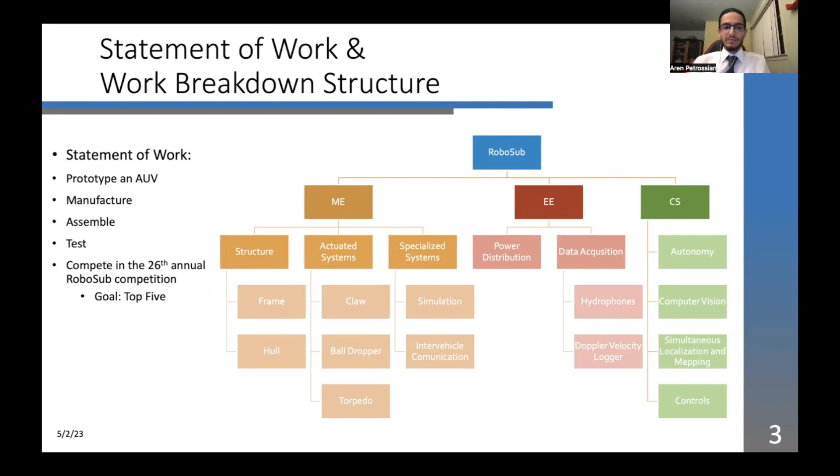For the 26th annual competition that we'll be participating in, it's going to be happening in the TRANSDEC in San Diego, which is a Navy testing facility shown on the right. And on the left, you can see a top view of this TRANSDEC where they broke down where they'll be placing certain tasks, and they put icons for what those tasks would be, like the gate, the buoy, the dropper, all of those different tasks.

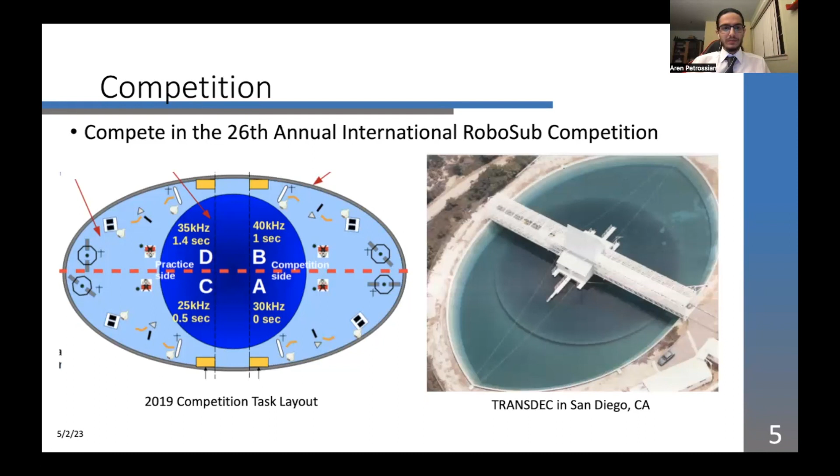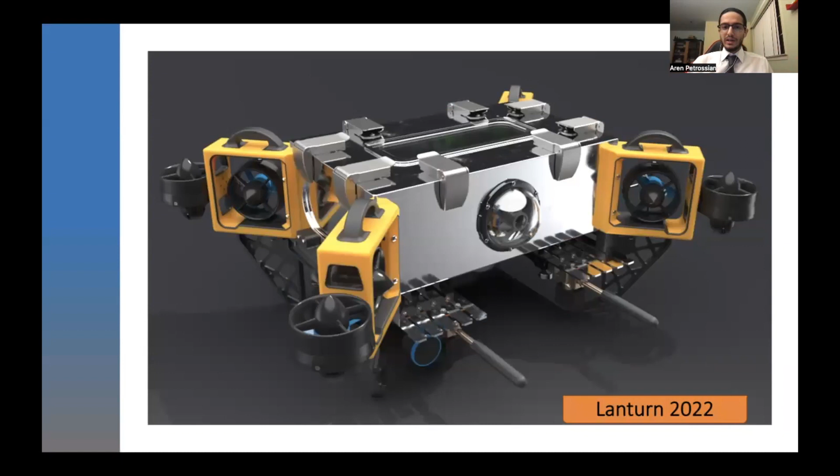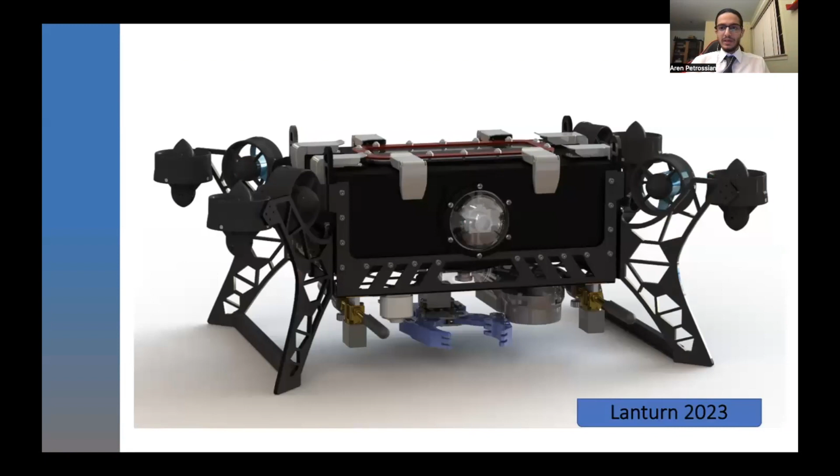Here we can see a photo of Lanturn, our robot. This was what the 2022 last year's senior design team had left off on. And on the next slide, we show our 2023 robot with all of the changes we've made, and we'll talk in this presentation about what those changes were and why we made them. But I'll continue by passing it on to Tianyu to talk about the frame.

Thank you, Aren. Hello, my name is Tianyu Ma. So I will talk about the frame part. For the frame, in the competition, the frame will provide adequate support for the critical components and be optimized to avoid stress concentration to withstand load without any deformation or failure, and also to be physically stable when we put the vehicle in the water.

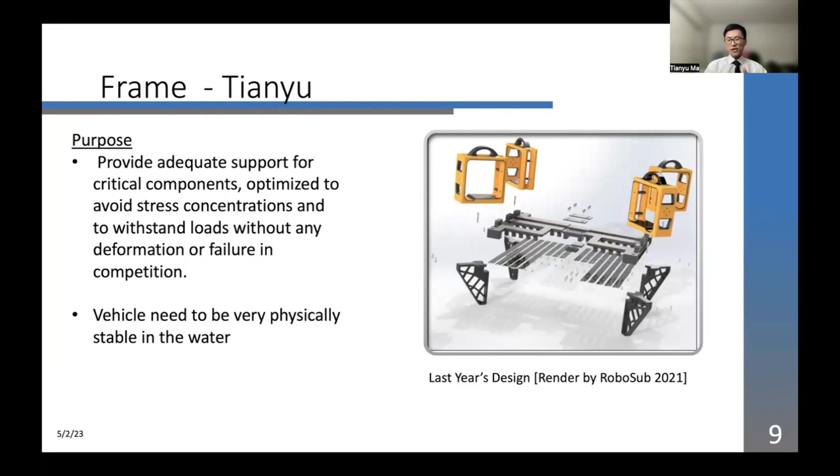So for the right picture, it shows last year's senior design team's design. We can see they used a lot of 3D printed parts, but this is not a very good design. So next slide, please.

So this year we just overruled last year's design because at the beginning, our advisor told us to avoid unnecessary intricate geometry and higher risk points of failure. So do not use 3D printing. And also, because the frame will mount 8 thrusters, the frame will give more strong mounting support. For this picture, it shows this year's new design. We use aluminum, cutting, bending, and welding to get this. Next slide, please.

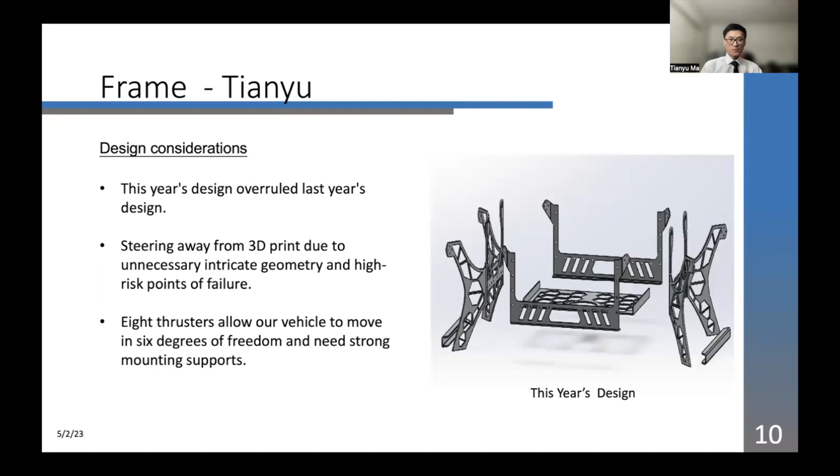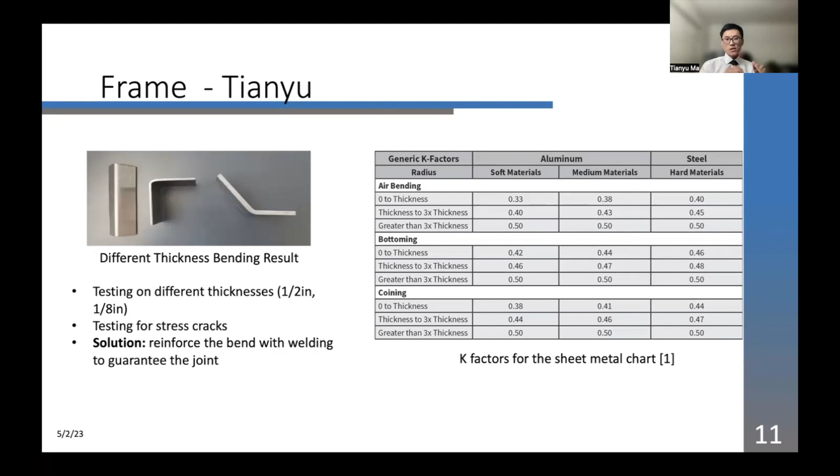When drawing from SolidWorks, we set the K factor as 0.5, but in real life it has various conditions, so we tried to bend for different thicknesses. This picture shows the result after bending. We can see it's a little bit cracked, which we don't want to appear in the competition. So we use welding to reinforce the bend and to secure the joint. Next slide, please.

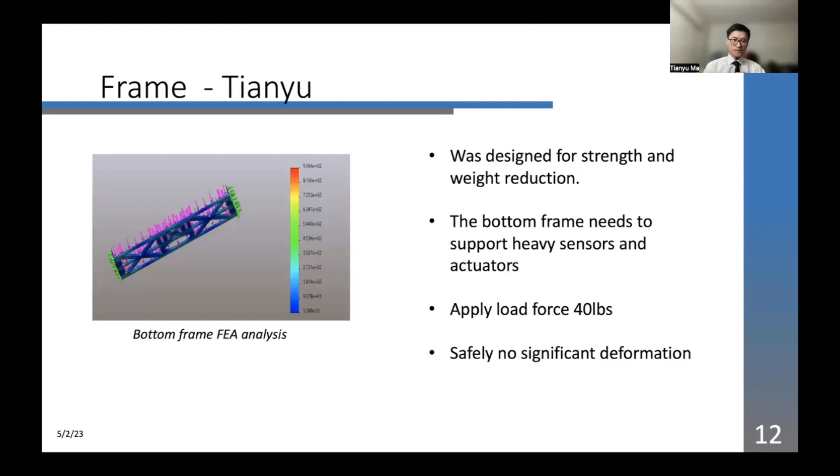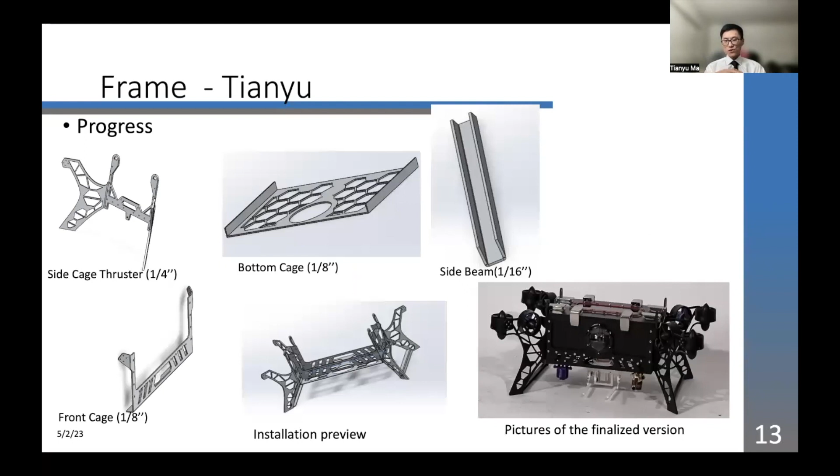We want to mount the camera to the hull, but there was no perforation, and the hull has no screw hole. Luckily, this year's camera is very small and light, only 17 grams, so it allows us to use 3D printing to make a bracket. We don't want to drill a hole because it will cause leaking, so to save time and let the CS team easily remove and reattach it, we use heavy duty Velcro rated for 10 pounds to attach the camera bracket to the hull.

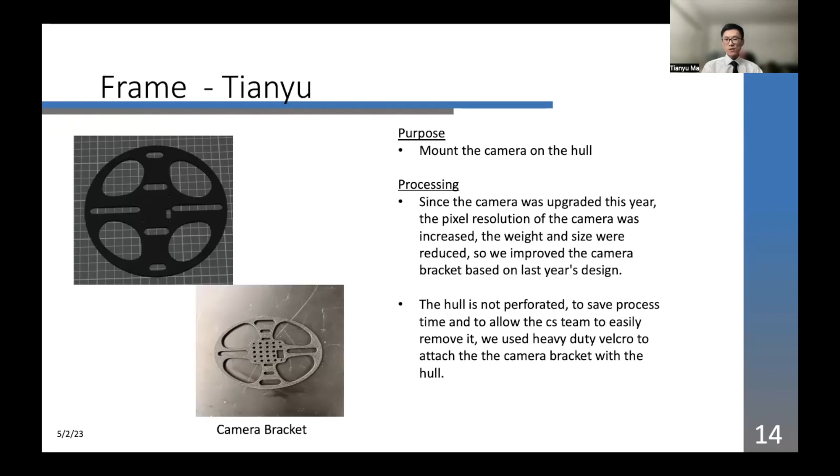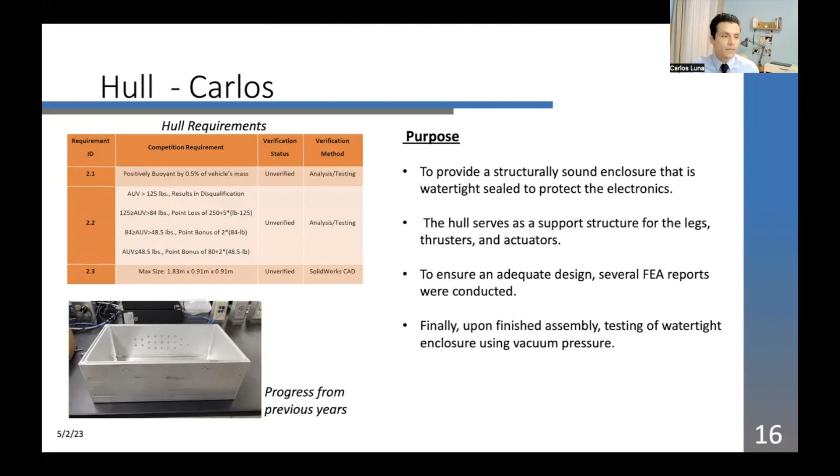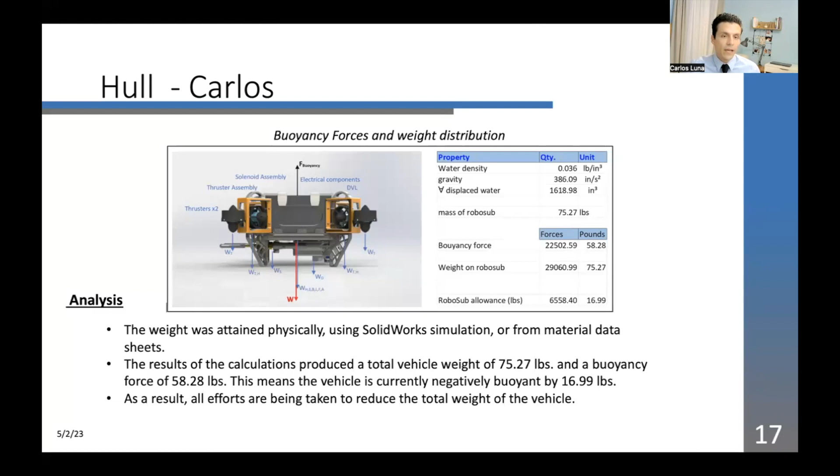The first thing I did was analyze the buoyancy forces and weight distribution. I took the weight of all the different components, and it ended up being 17 pounds of negative buoyancy, meaning we needed to reduce weight.

So the first thing I did was create some cutouts on the hull, which significantly reduced the weight. It was approximately half an inch thick, and I reduced it to a quarter inch thick. Of course, it then needed new FEA analysis. I also changed the design of the lid to reduce its weight as well.

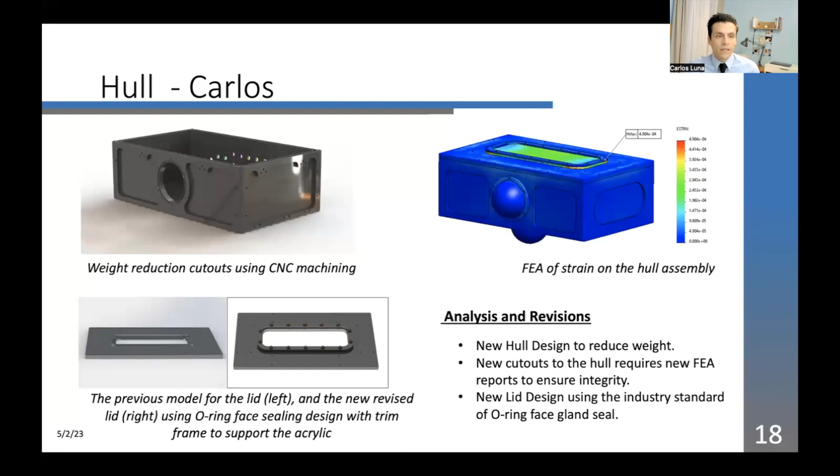The first thing I did was try transitioning to making the parts out of aluminum, machined on the CNC or mill, but weight became a factor, and the contour shapes were too complicated. So I decided to propose a new design, and after meticulous review meetings, the team finally approved it.

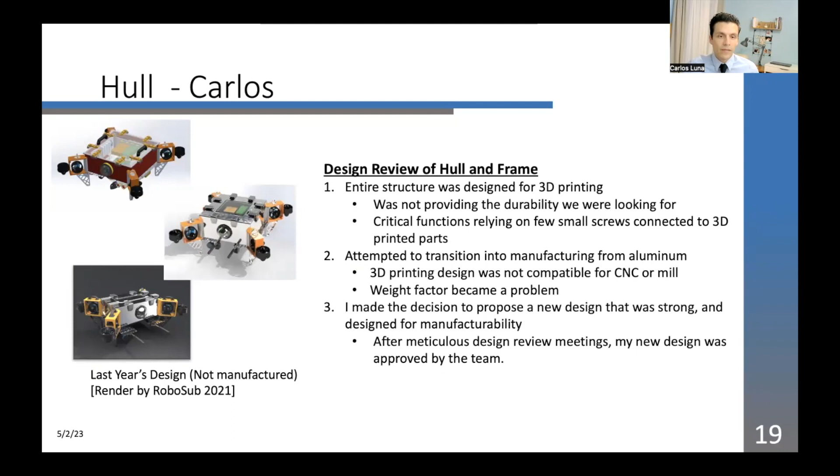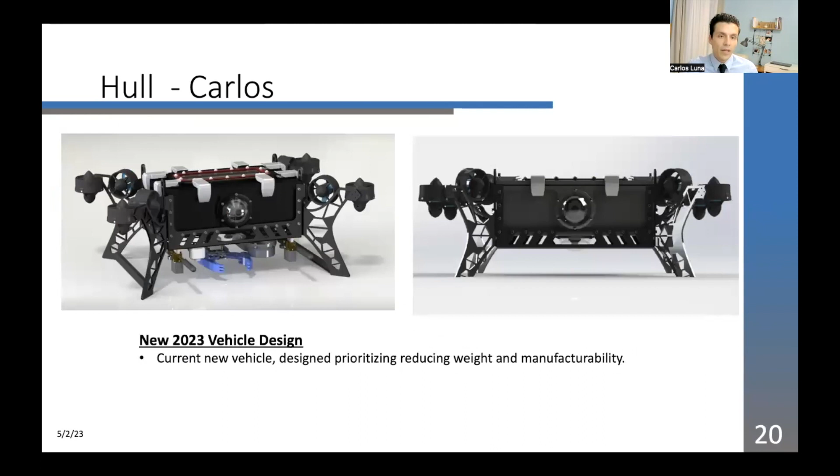This is the new design, prioritizing reduction of weight and manufacturability. It's made out of aluminum sheet with several cutouts to keep weight to a minimum. It also features a universal mounting system where you can mount sensors and actuators anywhere on the cage, with no need to drill additional holes into the hull. There are several rigging points, and the legs are really strong. So it was looking good.

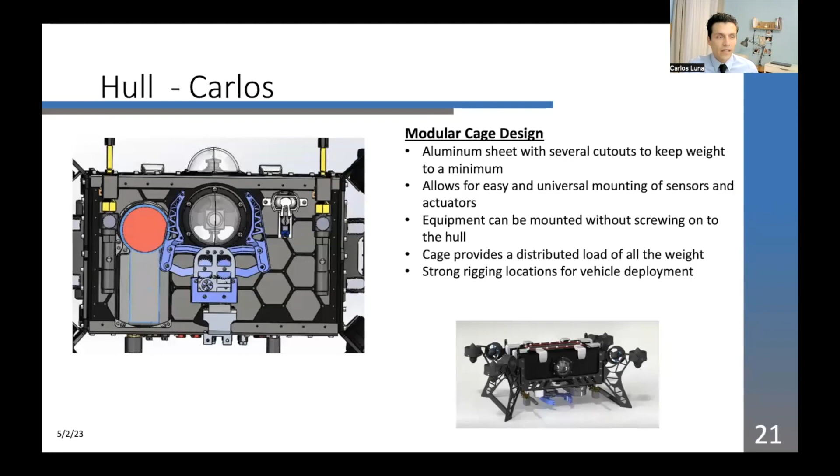Here we needed some new FEA analysis, with a factor of safety of 5, and it passed with no yielding. During modeling, I used sheet metal modeling that allowed me to easily flatten the sheet and produce the G-code needed for water jetting.

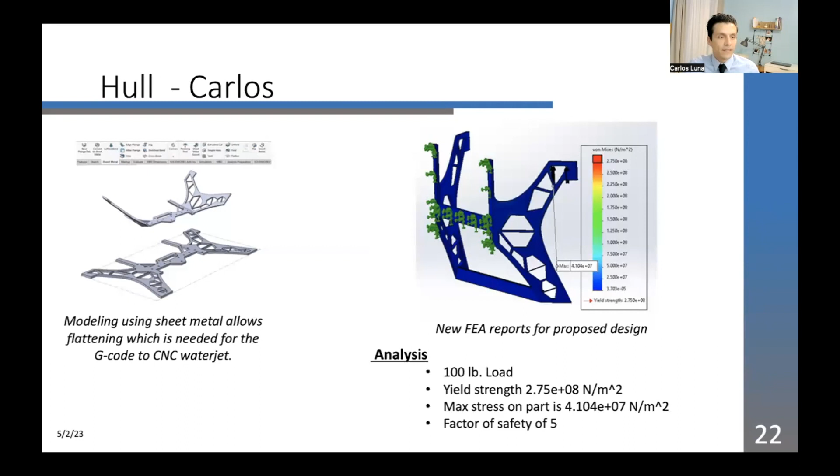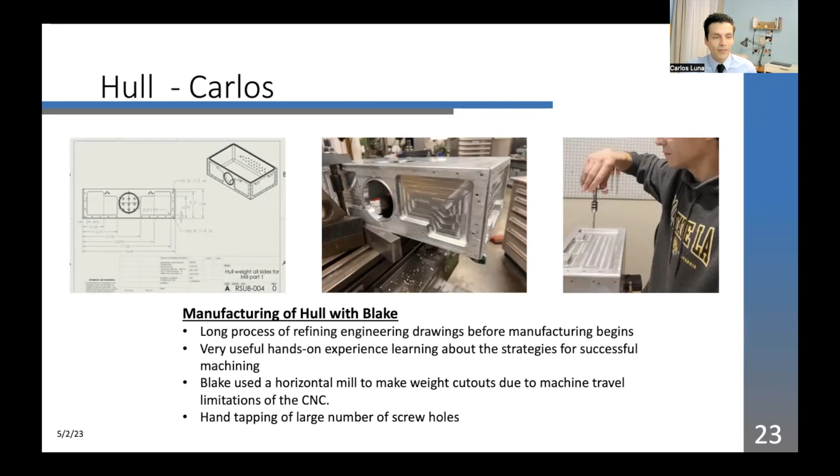Next was manufacturing, working with Blake. Initially there was a lot of back and forth, refining the engineering drawings. It was useful firsthand experience learning about tool passes and the limitations of the machines. Here you can see Blake's setup for a horizontal mill because the part was too big for our CNC, and on the right, you can see me hand tapping—there were a lot of screw holes to hand tap.

So I was under a lot of pressure to have this completed for the CS team to have a bot to work with, and also my own team to have a bot to work with. During spring break, I finished up the water jetting and cleaned up the parts after, though it still needed a little bit of fixing. I always did a fit check to make sure the parts were still fitting correctly after every single step. I completed the welding, the bending, the welding, and the anodizing.

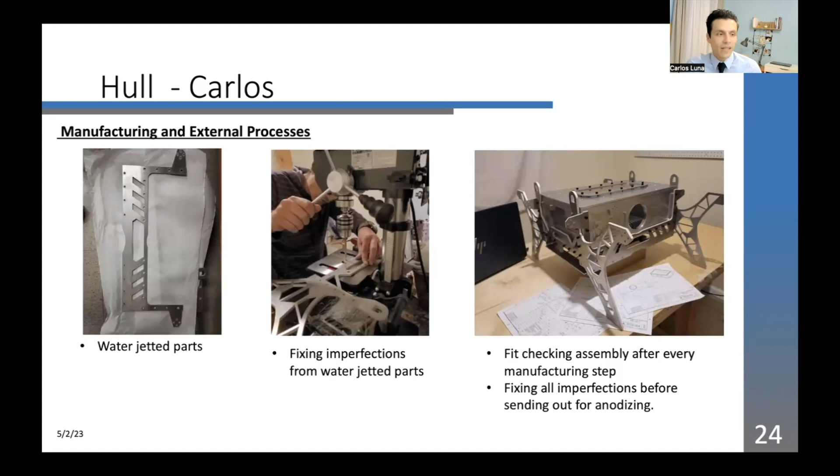Part of my tasks were to design a carriage for the inside of the hull to mount all the electronics. It features 3 different modes. The first mode is to be structurally sound for all the electronics. Mode 2 is for when you're installing or troubleshooting and need to look at all the electronics. Mode 3 is for competition, where you can easily swing open the motherboard to access the battery and quickly swap it out.

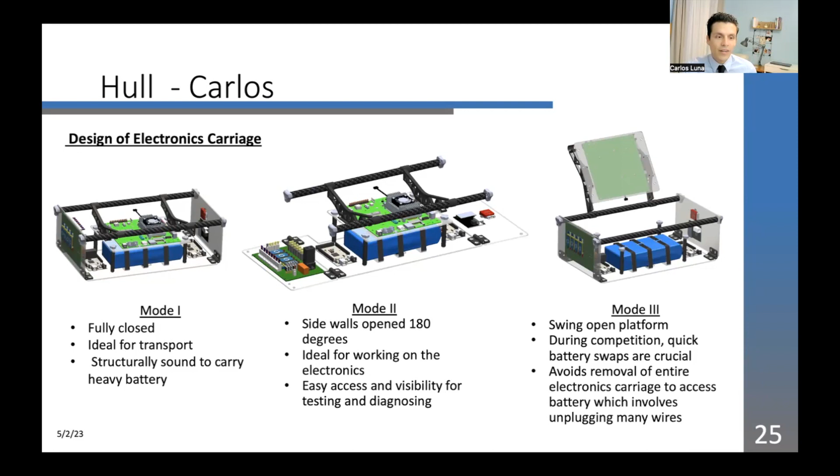Finally, we assembled the sub and had to do a vacuum test. It was very stressful because it was a year-long process of designing, and we had to make sure it didn't leak into the electronics. There were several points where it could leak, including a big O-ring between the lid and the hull, which I had to use the Parker O-ring handbook to make sure the O-ring was the correct size. I also had to calibrate the latches to make sure the compression was right. Here you can see the vacuum pump in action.

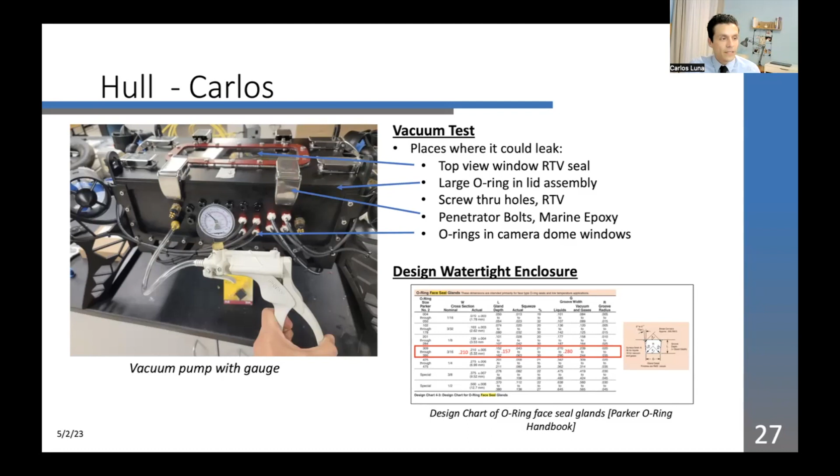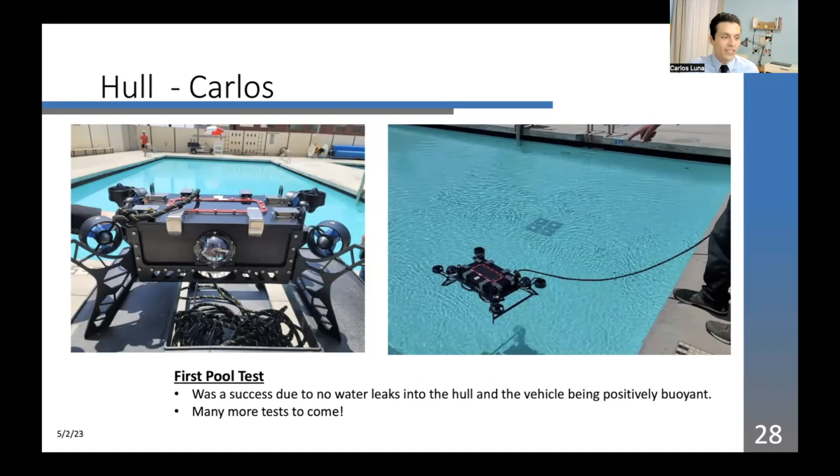This is our first pool test. We threw it in the water and it didn't leak, so we're very happy. It also was positively buoyant, so it was a huge success. However, there are many more tests to come.

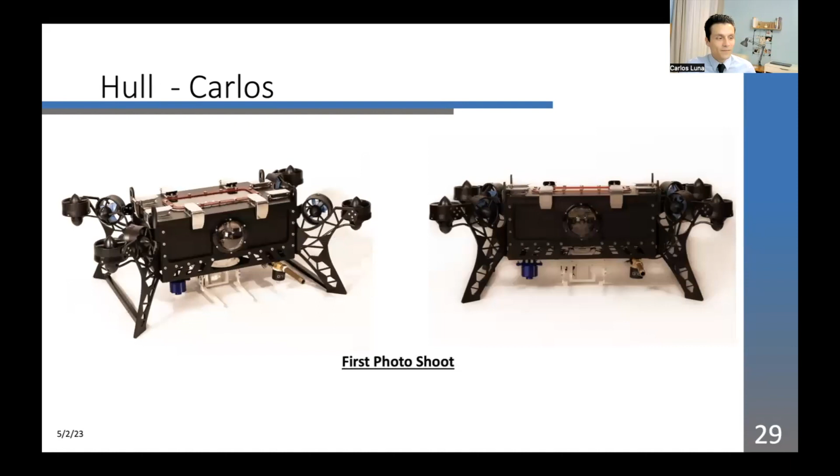This was our first photo shoot. This is our sub looking great. And with that, I'm going to pass it on to Edward Razo for the robotic claw.

I'll go down to design and functionality. The function of the claw is an actuator device that should be capable of picking up objects but also opening containers. It consists of two servos, two MG996R. The claw should be lightweight, less than 2 pounds, sturdy and waterproof. For the purpose of our claw for the competition, it should be able to pick up objects, mostly bottles, and drop it off at a set location.

Our claw should be able to open containers and move covers for us to receive full points. You can also see two designs of our claw from the spring and a picture of our final design of the claw.

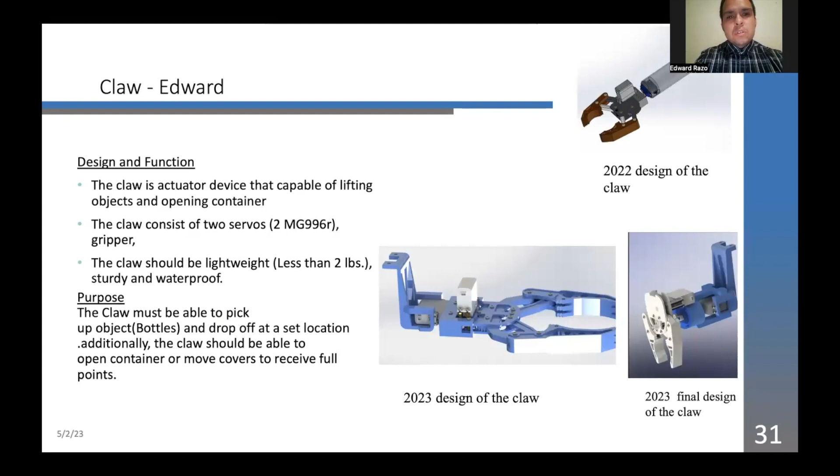At first, we initially thought it was a good idea for the claw to only have a motion of open and close. But another suggestion was to have the claw be able to rotate in case the bottle falls down or tips over when the AUV is going towards the object. Another suggestion was also to enlarge the claw's gripping ability, since we're not sure if the bottle diameter will be the same this year.

For the dimension of the claw, with the gearbox itself, it gives it 12.17 inches in length, a claw width of 3.32 inches, and it weighs 262 grams, equivalent to 0.56 pounds.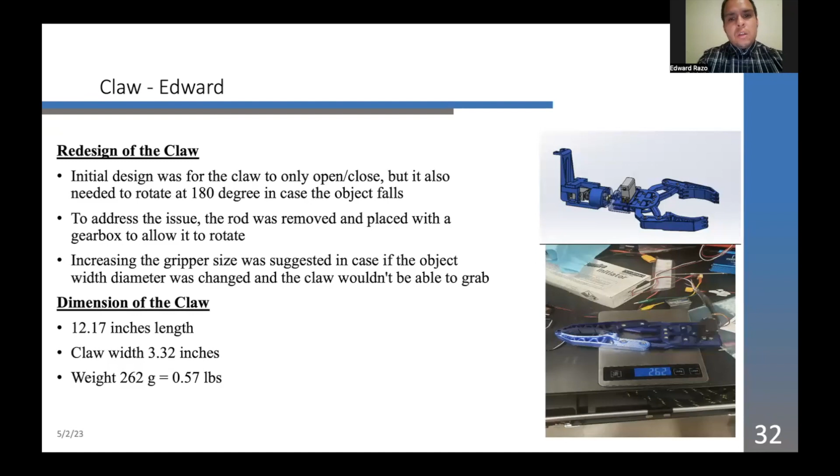Before commencing with the tests, I first put the claw in a water container just to see if it was watertight. You can see the video that it's in the pool. I'll do a repetitive motion of open and close at 4 feet. You'll see it soon in the video.

So far, it's been there for 45 minutes. There hasn't been any sign of water entering the servo, and that's a plus. It looks like the buoyancy force does not reduce the motion speed of the claw for its repetitive motion.

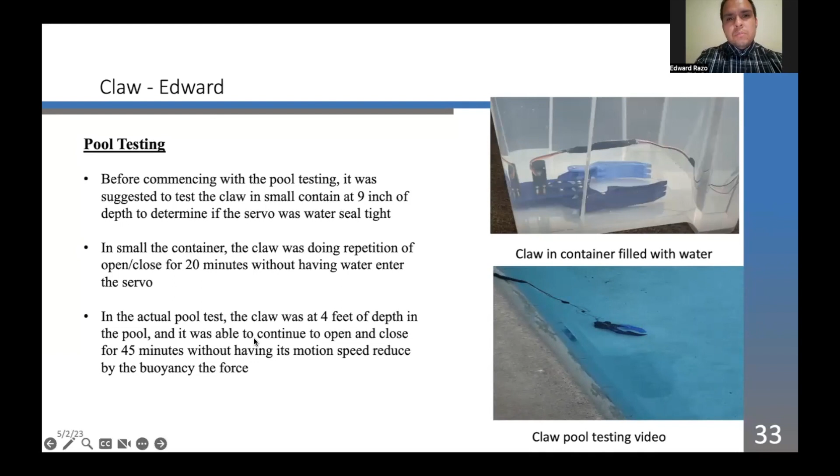Lately, in late March, we received updates to the claw rules and a new challenge as well. This was pretty much a deciding factor to change the design of the claw, both the claw and the gearbox.

The gripper itself has been shrunk. The claw width is now 1.19 inches. The length has been reduced from 12.17 inches to 2.54 inches. It's currently weighing 1.08 pounds, still less than 2 pounds. We'll continue with more testing in the near future.

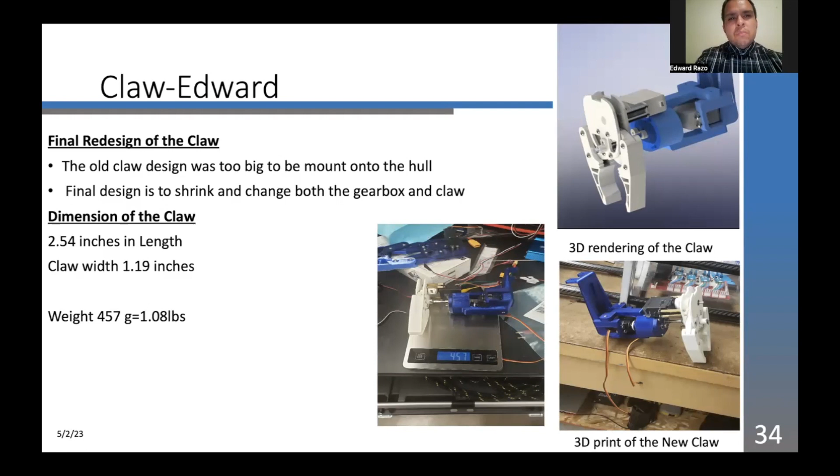Now I'll be passing the torch to the marker dropper. All right, Steven, thank you for that, Edward. My name is Steven, and I was working on the ball dropper for this school year.

The purpose of the ball dropper is to achieve one of the tasks of the competition, which is to drop two markers inside a bin, allowing us to have two markers at any given time. One of the design considerations was that we wanted it to hold two markers as compact as possible to reduce the space it occupied.

We wanted it to be easily reloadable, easily manufacturable, and at a low cost, so that if anything broke or if we had to redesign for any given reason, we could do so in a cost-effective way.

We also wanted to keep in mind that the mass and volume would not exceed what we had already designed for, which was half a pound, with the markers fitting in a space of about 2 inches squared and a height of 6 inches.

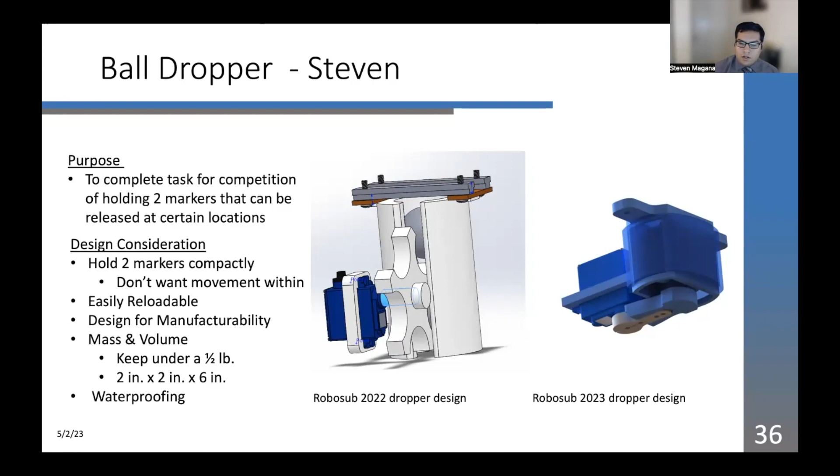Furthermore, the servo used to actuate the dropper needed to be waterproofed, and that was done using dielectric grease inside the servo so that water wouldn't penetrate inside.

Going off the previous year, we wanted to maintain as much of their design as possible to see how we could continue. Initially we decided to keep it vertical and just change the mechanism that actuated the drop. We went with a lever mechanism that released and locked the marker simultaneously.

That was done to address some of the concerns of jamming from the previous year, and also to limit the actuation angle of the servo so it wouldn't draw too much power.

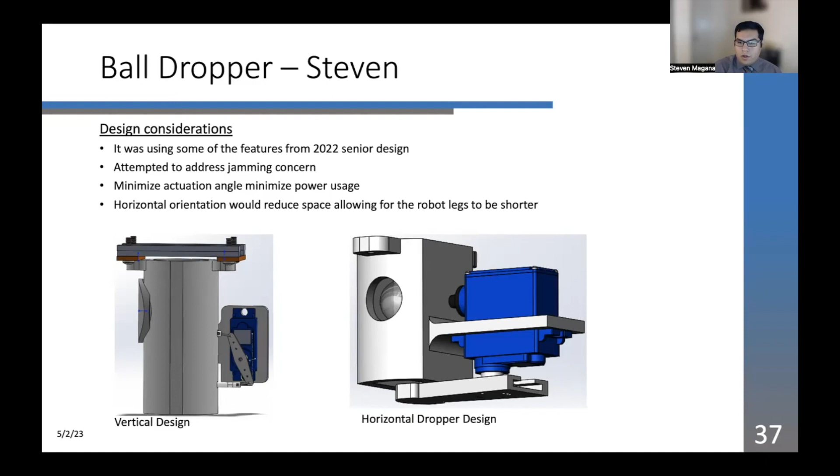After some discussion, we decided to go with horizontal markers so they would be side by side. That would reduce the overall height of the dropper and also reduce the volume by decreasing the markers themselves. At the bottom, you can see both the vertical and horizontal droppers.

The new markers were kind of looking like projectiles, like a bullet. The size was 1 centimeter squared, or rather a diameter of 1 centimeter. The buoyancy of the marker was 1.23, mainly dictated by the material, which was PETG. It was 3D printed, encasing a marble at the cone.

There was some stress analysis to make sure we wouldn't decrease the wall thickness too much, and it was well above—it didn't exceed the yield strength of the plastic.

The final design reduced the overall volume and decreased material usage, optimized using SolidWorks. We decreased the size of the marker and reduced the actuation to at least 25 degrees of rotation for each marker.

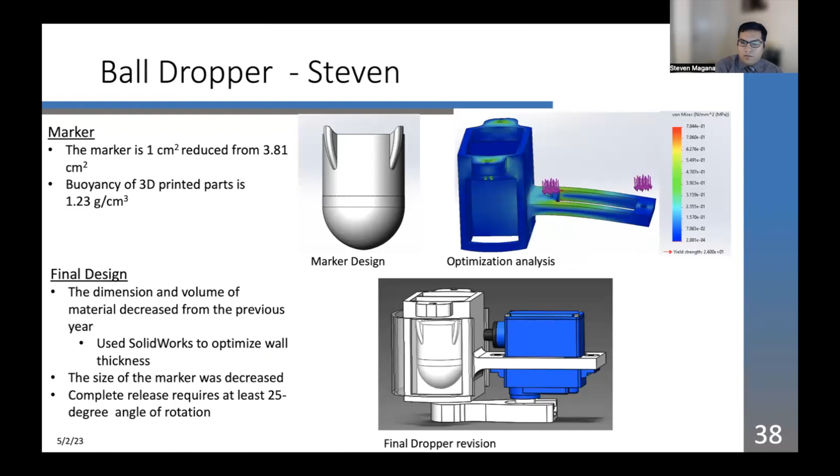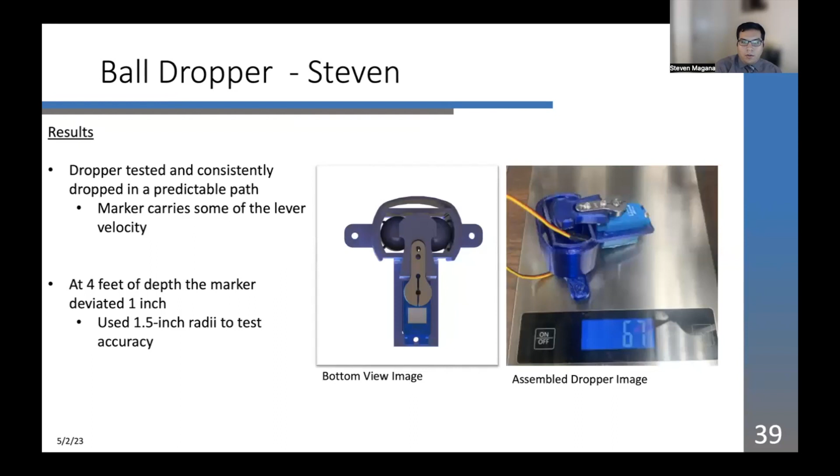The results were that the markers and droppers together weighed 67 grams. When releasing the markers at a pool depth of 4 feet, it deviated 1 inch; at a depth of 5 feet, it had 1 foot of travel. With that, I pass it on to Jose.

Thank you, Steven. My name is Jose Lares, and my task was the torpedo. For the problem definition, we're going into the RoboSub competition in San Diego for the 2023 year.

Some of the product requirements: a consideration for the competition was that it must not weigh more than 2 pounds. The torpedo must bear the name of the school and use a school logo. Also, the torpedo must not bruise a diver, and it should be designed to be safe and not harm a swimmer while the torpedo is shot. Also, the torpedo launcher system must be autonomously controlled by the robot.

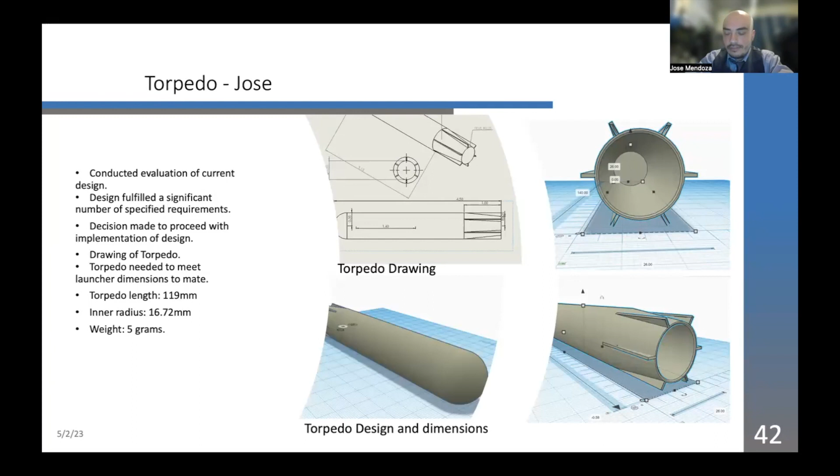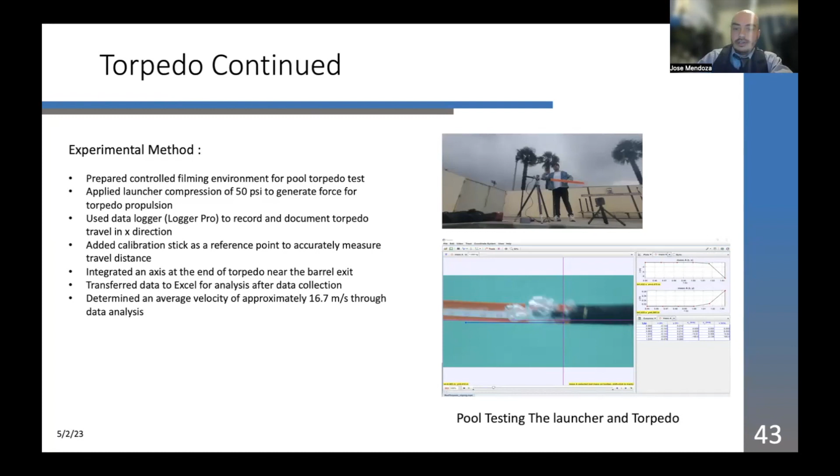To the right, you can see the equipment and setup, but that same setup would be used underwater inside the pool at a depth of about 3 feet from the ground up. To the bottom right, you see a graph from the logger software.

For this slide, I conducted research on how to build the torpedo, how to manufacture it, and what plastics to use. I found through a TA that a gyroid infill pattern provides balance between strength and weight. I used an infill of 50 to 65%, which was considered. To the right, you see an image of various torpedoes printed at different infills, and above those 3D printed torpedoes you see others with different patterns cut in half. I used multiple torpedoes to test underwater, and found that the one that was neutrally buoyant underwater was at 65% infill.

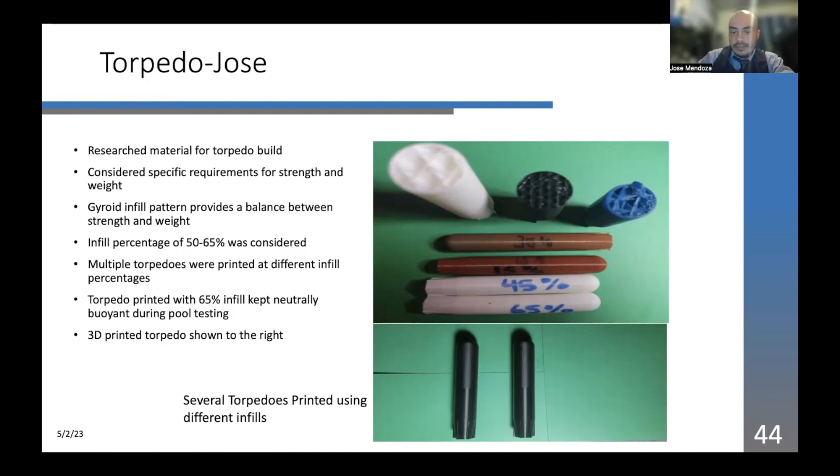On the bottom, you see the torpedoes that are going into the competition along with the AUV. And I will be handing over the camera time to my colleague Nahom, who will be delivering the simulation.

Thank you, Mr. Mendoza. So the purpose of the simulation is to develop a virtual physics-based environment to support the rapid testing and evaluation of the autonomous underwater vehicle, particularly from the software controls perspective. This is so the CS team and software development can keep moving forward while the physical robot's mechanical and electrical hardware is still being developed. On the left you see our inspiration, Project Dave, an open source project in ROS, Robot Operating System, where you have autonomous robots underwater, a demo that interacts with objects with a claw and functional thrusters. It's meant to be an iterative design process, as illustrated on the right.

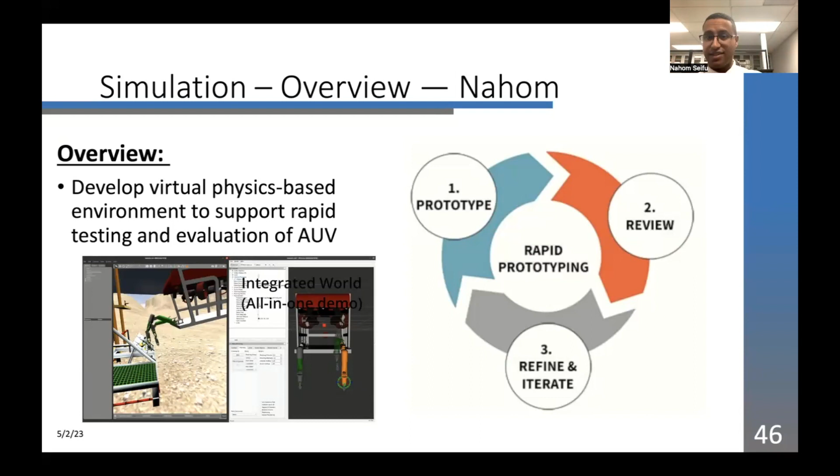So the main objective was to have, by the end of this spring, a virtual twin of the autonomous underwater vehicle to predict vehicle performance, with inputs being the software controls, and we can also look at the hydrodynamic data from there.

The deliverables were to determine the means of analyzing the model data, inserting this year's robot into ROS for evaluation, and implementing the competition obstacles and mission, as seen on the right. Part of the motivation for using ROS was that we can have a physics-based engine for implementing sensors as well, getting feedback there.

Using ROS would eliminate additional steps, since the code in ROS for the controls would have less processing to get it into the robot than if we used something like MATLAB. That was the advantage of picking Gazebo ROS, which also provided the opportunity to go into low-level C++.

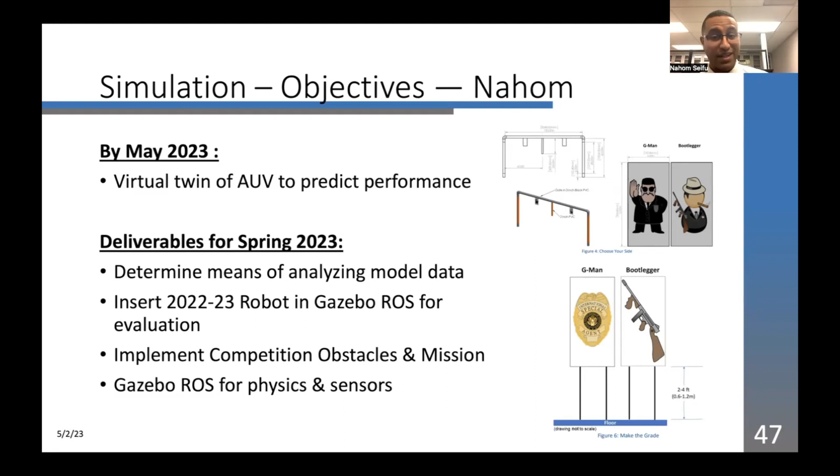So a day in the life of the workflow, to keep it high level, was a lot of working with the terminal. There was a lot of time taken installing the software and starting off with our inspiration, Project Dave, an open source project that you see on the left side of the figure.

And that's where it took a lot of inspiration to begin the project.

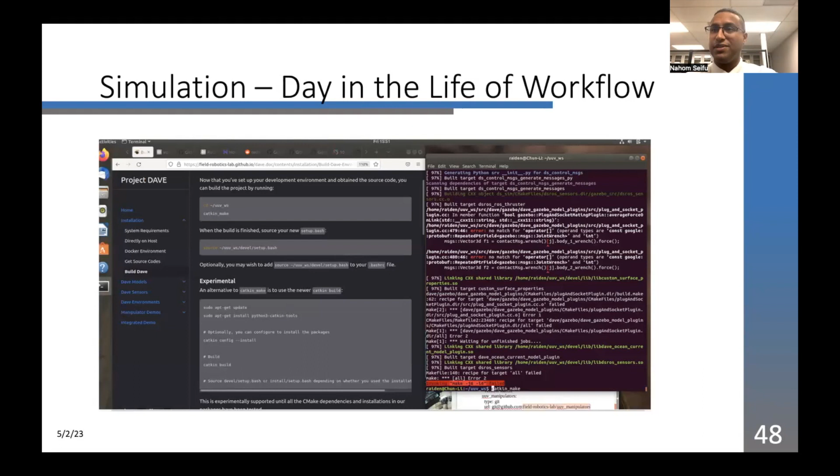The big highlight and milestone was to have a working demo of a robot from Dave that actually moves around the ocean floor with some physics based on water and the actual mechanical properties of the robot. So we set it to some fixed velocity for pitch and yaw and the thrusters, and we got it moving in a circle, which is a big achievement. This verified the proof of concept.

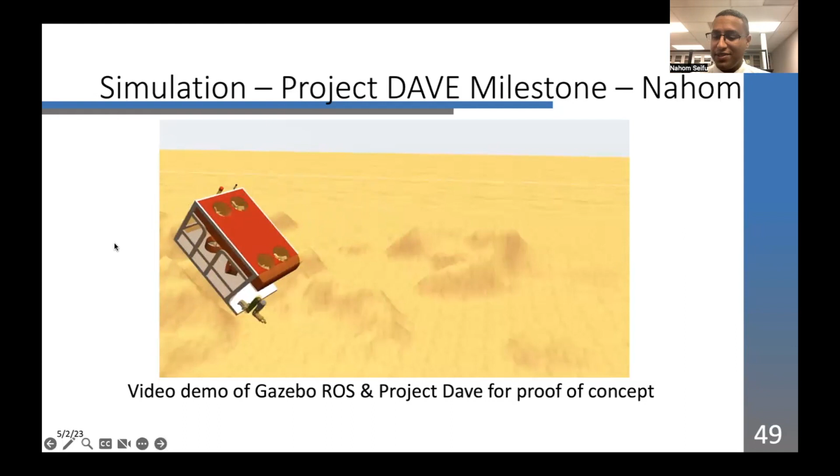The next big steps there are actually getting the robot into ROS, our robot, and having it function. That's where a lot of troubleshooting came in.

So we had to verify that the model data that we pulled from SolidWorks, along with basic hand calcs, actually made sense. From there, we got thruster positions that were rectified and a robot that better behaved, that better followed the laws of physics.

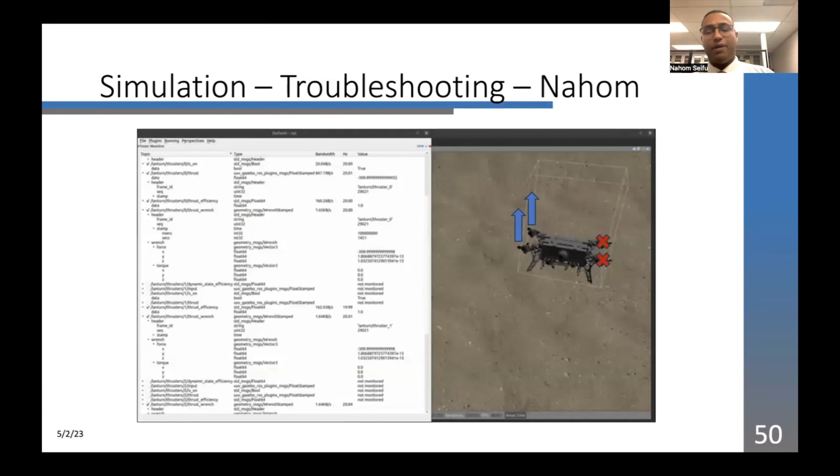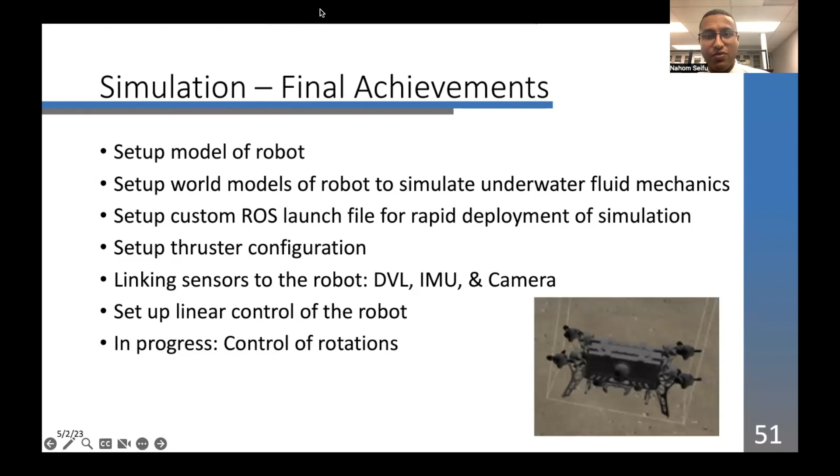The best part about this platform is that it exists. It'll exist for future RoboSub team, senior design, and club to develop their control software while mechanical hardware is being developed in parallel. Thank you very much, and I pass it on to Aren Petrossian.

Yeah, okay, thank you, Nahom.

So for the intervehicle communication task, 1,000 points are given in the competition for teams whose two AUVs are able to communicate with each other. The communicated data could be anything from a simple Boolean to floats of XYZ or yaw, pitch, roll orientation values. Previous years from Cal State LA haven't attempted this task, but the two most common ways to do this are with blinking LEDs and with sound waves, or acoustic waves.

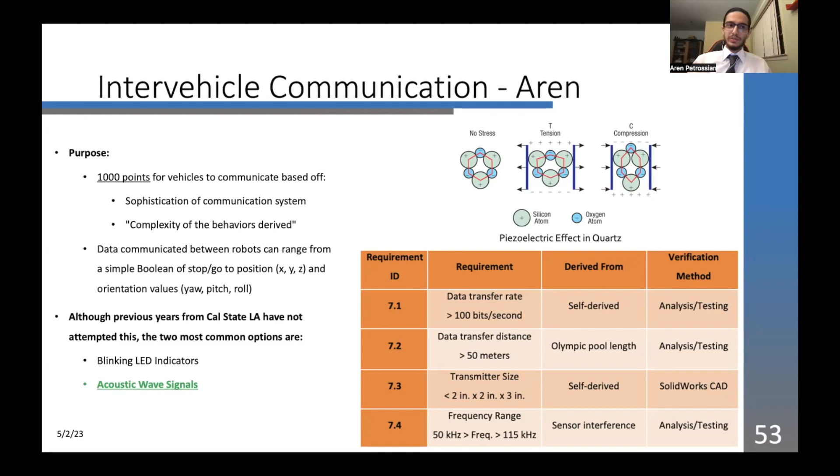Because the points are based off the sophistication of the communication system, we decided to go with acoustic waves. The main effect used is the piezoelectric effect, shown in the top right. For the system I'm making, my requirements were to have a data transfer rate of more than 100 bits per second, to be able to communicate from more than 50 meters apart, to have a small transmitter size, and to have a frequency range somewhere between 50 to 115 kilohertz, which came from competition rules and other sensors interfering.

On the far right here, you can see a PZT cylinder, which is the core of the device I made. This cylinder takes a voltage wave and gives out a sound wave at the same frequency as the voltage wave. I looked at various different PZT options and decided to go with the Steminc 65 kilohertz PZT.

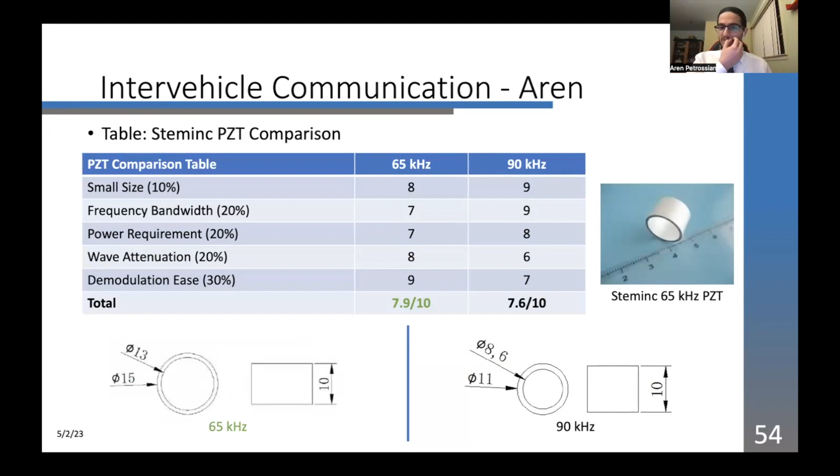For this PZT to work, I had to encase it in epoxy. But to do this, I needed to make sure the PZT would be centered inside the epoxy. So I decided to make this mold along with two spacers out of PTFE, which I machined using a lathe and a mill.

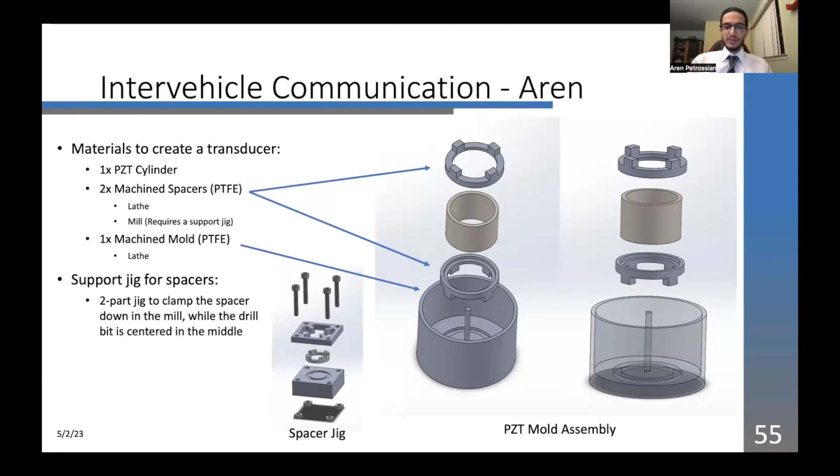Machining the spacers on a mill requires a support jig, shown in the bottom left. This was a two-part jig where I just screw the lid on and hold it in place while the mill runs.

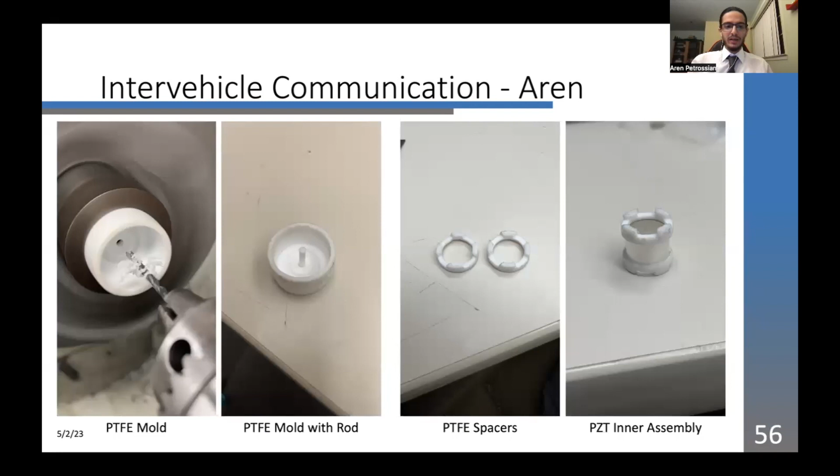This is a photo of just the machining process, making the parts and putting everything together. If I skip to the next slide, I can show on the bottom left, this was the completed mold assembled and put together. You can see the mold on the outside and the PZT sitting between the two spacers.

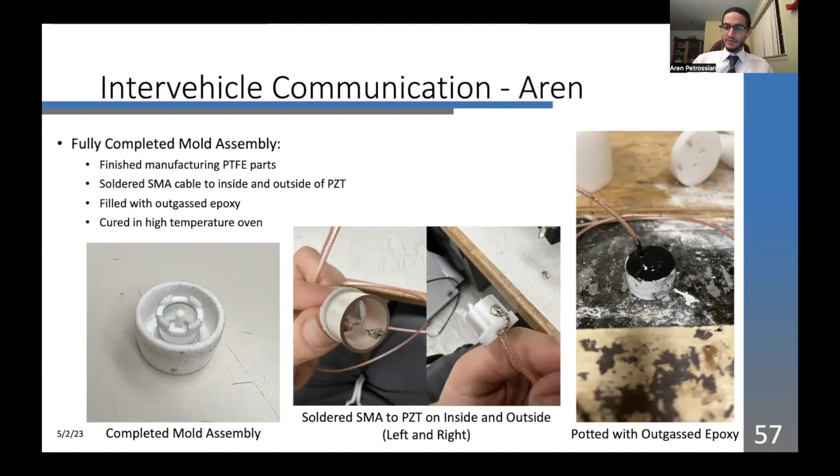In the middle, you can see one wire that's soldered to the inside of the cylinder and one wire that's soldered to the outside. This allows me to apply a voltage to the material. On the far right, you can see the mold that I took with the PZT inside filled with outgassed epoxy.

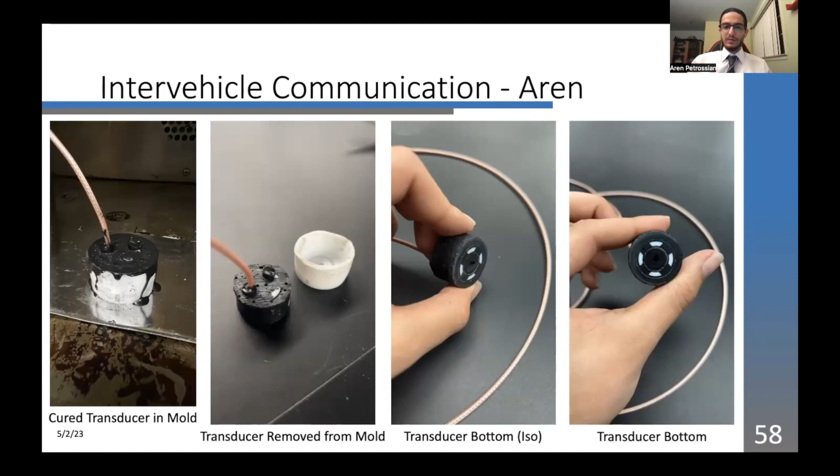To actually power this transducer, I had to come up with a power circuit option that would let me give it a high voltage sine wave. So I looked at various circuits shown in the top left and found the R15-100B boost converter on the bottom, which takes our battery voltage and outputs up to 130 volts.

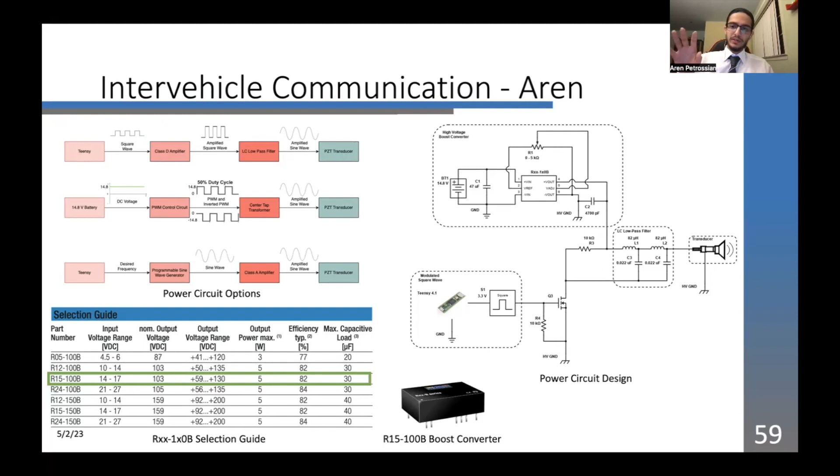So I took this circuit, since I knew that it worked, and put it into KiCad and designed a PCB around it, and there's a render of that on the left.

Then I took my transducer with off-the-shelf components, like with an oscilloscope and function generator, to a pool, and I put my transducer on one end and the hydrophones, which is like an underwater microphone, on the other.

I was able to send a single pulse, which you can see in the top left of the MATLAB figure. That's the raw signal that the hydrophone received. Then in the top middle, you can see the frequency domain of that. So you can see I sent 80 kilohertz and it got a massive peak right at 80 kilohertz.

Then in the top right, I filtered that data with a simple bandpass filter, and everything seemed to be working perfectly. In the bottom, I enlarged the ping that you see in the top right, and I did a smooth envelope around that, and finally did a binary envelope of just 0 or 1 to say whether or not it got data. Everything seemed to be working perfectly, and we were able to get data from 30 feet away.

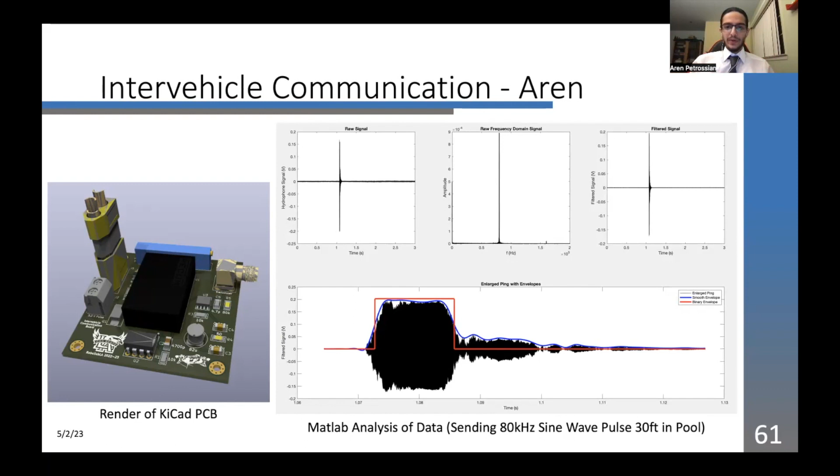And I'll pass it off to Anthony to talk about the power distribution.

Hello, my name is Anthony Zelada, and I worked on the power distribution board for RoboSub.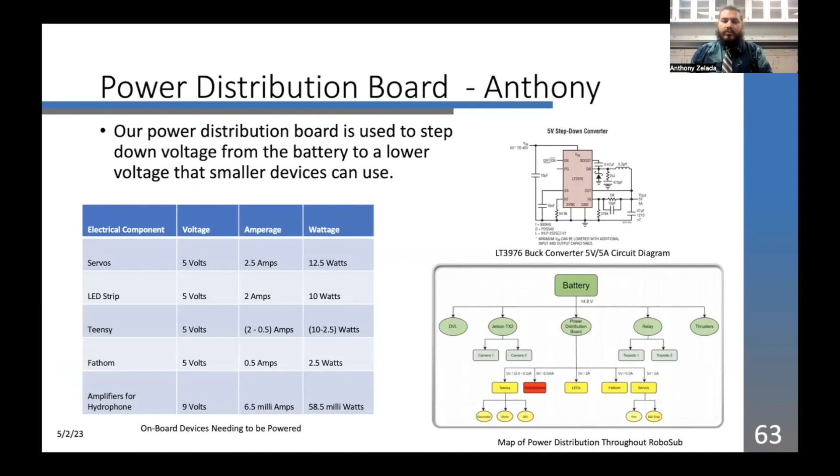The beginning of the design started with the review of the previous year's team's design. Last year's team selected the LT3976 buck converter because of its high efficiency. A buck converter is a main component that makes the power distribution board possible and steps down the DC voltage to make it usable.

Another point was I researched other buck converters and selected a high current, high efficiency buck converter called the MP8771. This was due to many devices that are being powered by the distribution board and would reduce the size of the board because I would have to use less buck converters.

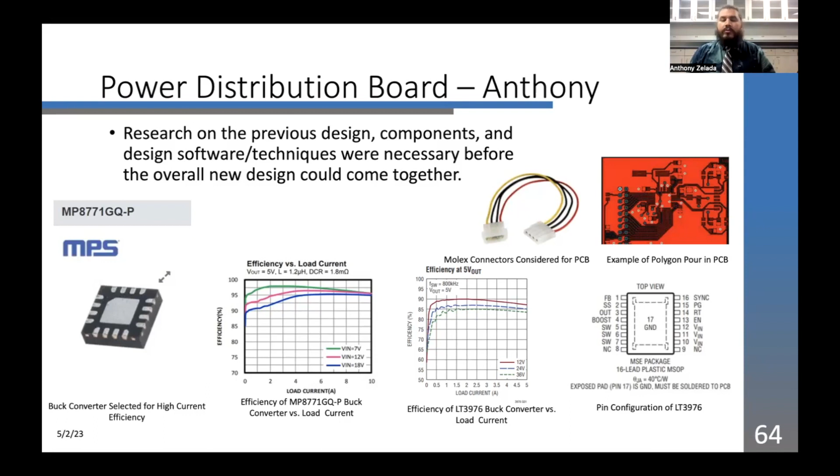I also researched methods of constructing the board and what would be the best way for the board to be constructed, methods such as the polygon pour versus the trace width and how they could be used together. And also for connection purposes, I looked up Molex connectors and how they could be able to power the board.

At the end of the first phase, I had most of the plans of the board figured out, and I would use 3 buck converters, 2 MP8771s and 1 LT3976, to power all components. I also had both circuits designed and selected for the buck converters, and I made a power budget to calculate the power the board would supply to the load and draw from the battery, and the overall system efficiency.

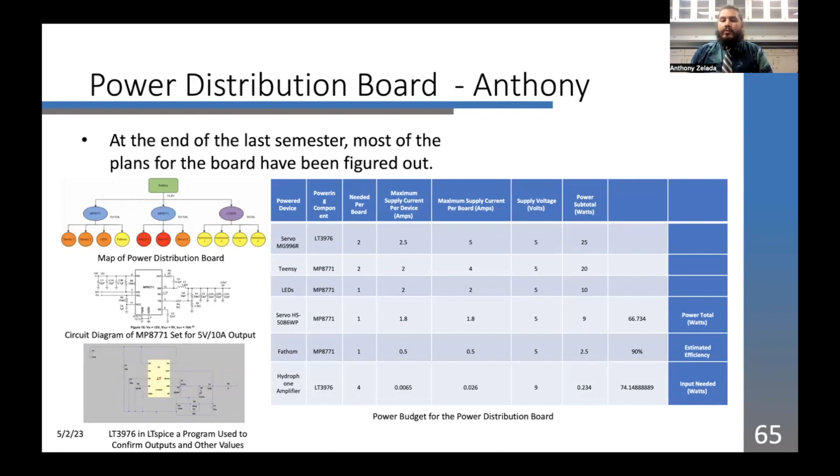At the beginning of the second phase, I encountered some setbacks. The MP8771 buck converter I selected went out of stock and I had to redesign. To keep the board small, I ended up choosing to move the Teensies over to the motherboard, a Jetson TX2, and also program the RoboSub not to use more than 1 servo at a time. This way, the most current the board would draw at one time is 2.5 amps, which is optimal.

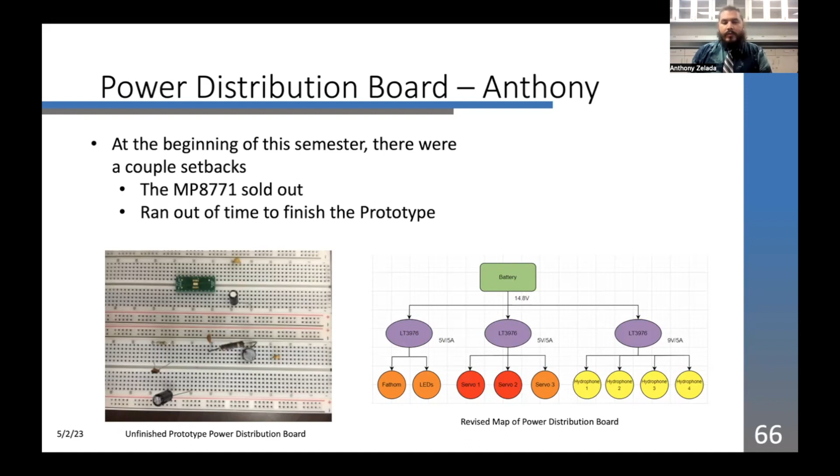Also, due to time constraints, I decided to move on to the fabrication process of the board instead of finishing the prototype board. The prototype was going to be used to make sure the simulation works with actual components, but it was unnecessary.

There were 2 crucial software programs I needed to complete our power distribution board. I had to use one software to simulate the circuit and confirm that the circuit design from the data sheet of the buck converters would be correct, and tune the output of the voltages. The 9 volts was not given in the circuit diagram. The software I used for this was LT Spice.

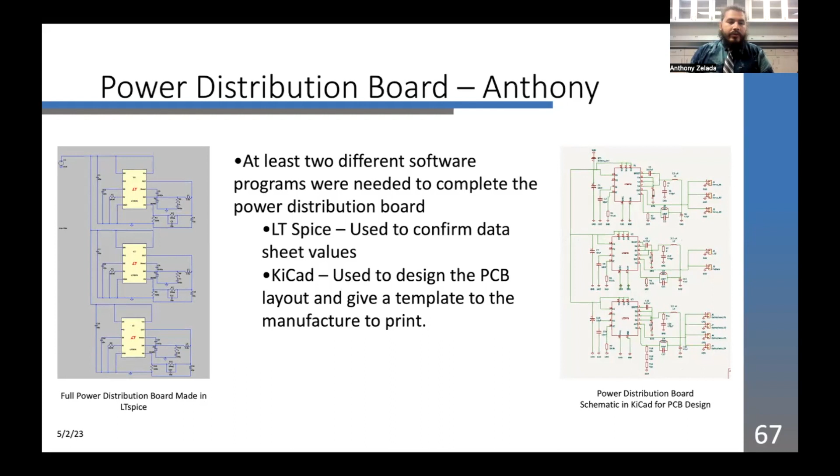I had to use another software program to produce a blueprint of what the PCB power distribution board would be printed on. This was used to give something to the manufacturer so they know exactly what to print. The software I used for this was called KiCad. I have LT Spice on the left and KiCad on the right.

The finished design was my first version of the power distribution board. The picture on the left is the PCB layout of the board, and it shows how all the components are connected. I had to select all the components, assign the representation for them on the board, and arrange them in a compact fashion that also still provided a good flow for the power.

On the right, I have a picture of what the power distribution board should look like after everything is soldered. This is rendered because the board is still out to be ordered. As soon as it gets back, the only step left is to solder all 90 components to it and hook it up to the RoboSub.

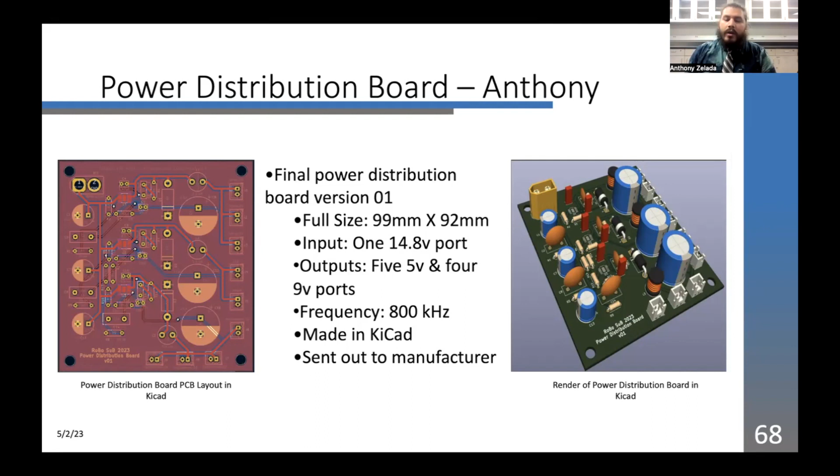Thank you, Anthony. Hello, my name is Cristian Mota, and I'm in charge of the hydrophones. A hydrophone is an underwater microphone usually used in deep sea exploration, but for this competition we will be using it to detect different pingers that set off frequencies ranging from 25 kilohertz to 40 kilohertz, placed at different depths throughout the pool.

In our robot, we will specifically be using an AS1 hydrophone. This is perfect for our purpose, since its frequency detection range is from 1 hertz to 100 kilohertz and can be submerged up to 250 meters. The pool for the competition is roughly 40 feet, so it's more than good enough. Each hydrophone weighs 8 grams, and we'll be using 4, so it'll keep our robot light.

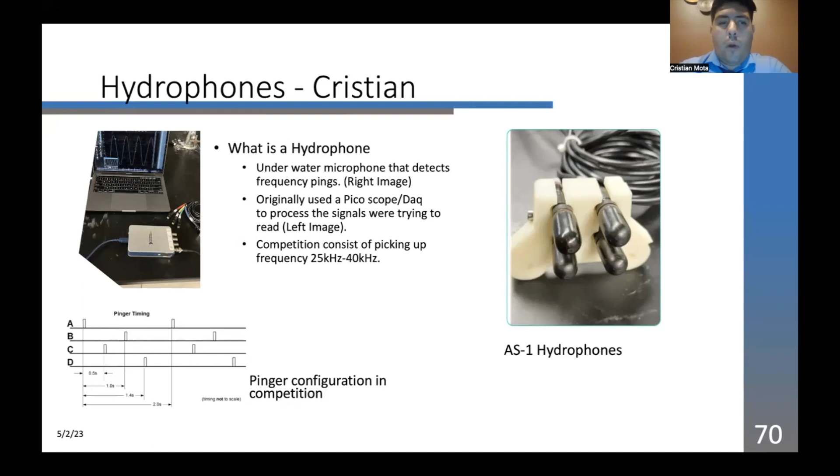Originally, previous years were using 2 MATLAB codes. One was for frequency detection, which detected frequencies from 25 to 40 kilohertz using a Butterworth filter to determine the max frequency and then take its FFT. The second code was to find the angle and distance of the pingers in order to perform the phase shift.

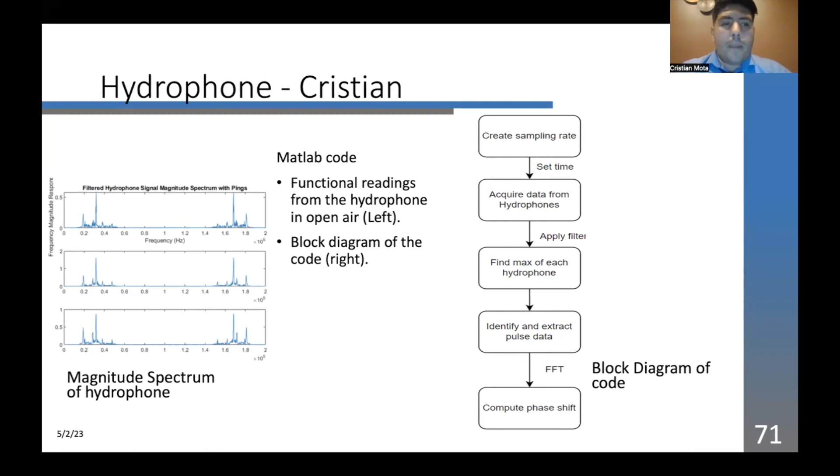So for this year, since we're using a Teensy board instead of an Arduino, we're gonna be running the code directly. We're gonna be getting rid of the DAQ system since we're gonna be running it directly from the Teensy board. This is beneficial in two ways: now we have to change the code into C++, which is better for real-time response, and we also get rid of the DAQ system, which decreases the weight of the robot by 157 grams.

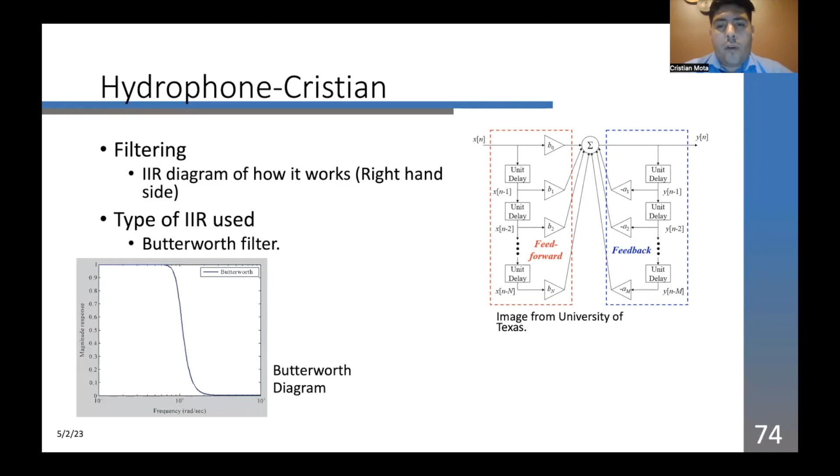Just like with signal processing, there are multiple filtering techniques we could have used for our code. We went with the infinite impulse response because it's best for audio equalization and has low latency, making it faster and better for our task. There are multiple infinite impulse response filters we could have used, but we went with the Butterworth because it gives us a smoother outcome for our task.

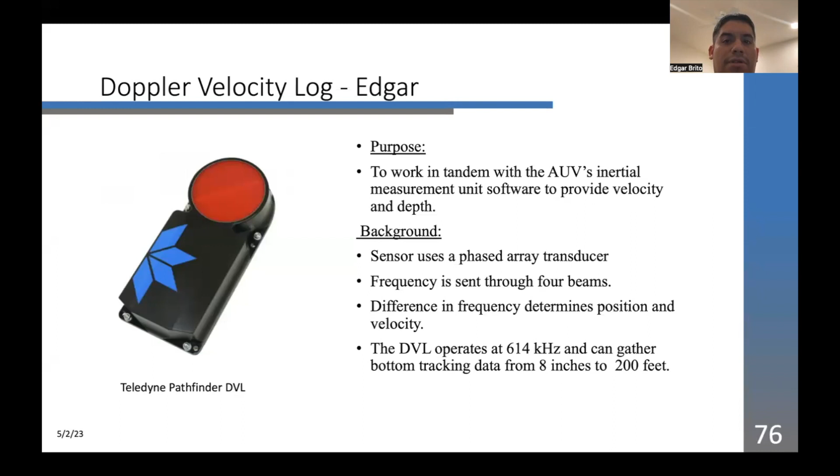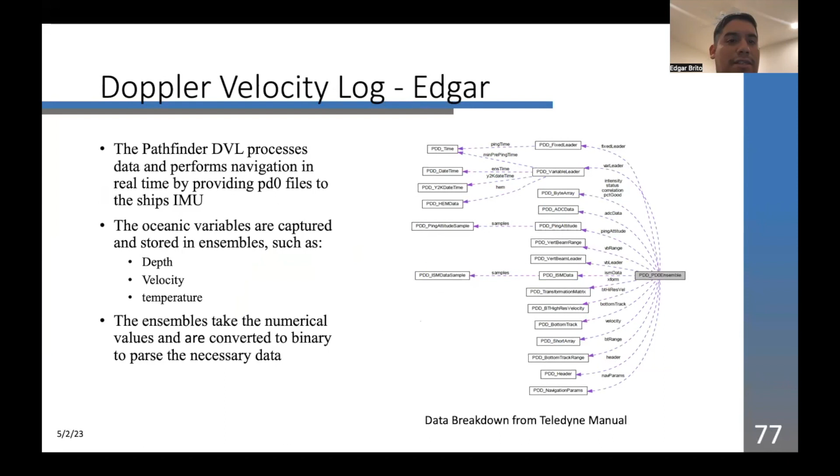The Pathfinder processes data in real time and provides this in raw files called PD0s. It provides this to the IMU to process. It contains ocean variables such as depth, velocity, and temperature. These variables are stored together in ensembles, and the graph on the right represents the data structure breakdown collected for an ensemble. Next slide, please.

The DVL's minimum requirement is 8 inches of water, but it requires a bit of space, not just that minimum depth. Using smaller containers, we would get feedback from the beams and get an error result. It operates on serial and Ethernet interfaces, but Ethernet is required for C++, which we will be using. Next slide, please.